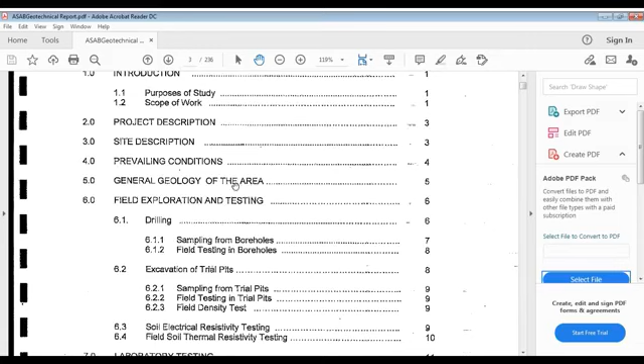It says introduction, purpose of study. What are the purposes of study? Then scope of work. After that is project description and site description, prevailing conditions, general geology of the area, and then field exploration and testing, which includes drilling, sampling from boreholes, field testing in boreholes, then excavation of trial pits, sampling from trial pits, field testing in trial pits, field density test, soil electrical resistivity testing, and field soil thermal resistivity testing.

Laboratory testing, laboratory tests on cores, surface and subsurface conditions, ground materials, materials' physical, mechanical and thermal properties, materials' chemical properties, sulfate content, chloride content, other chemical contents, oil and grease and hydrocarbons, pH value. Then groundwater and cavities, then general discussion for choice of suitable foundation, which is a very important one, footing on sand, general consideration of settlement, consideration of bearing capacity, choice of type of foundations.

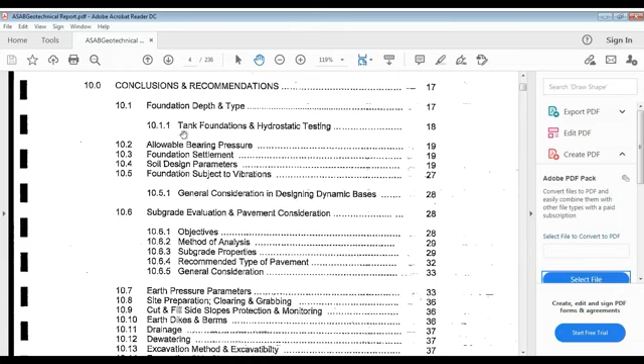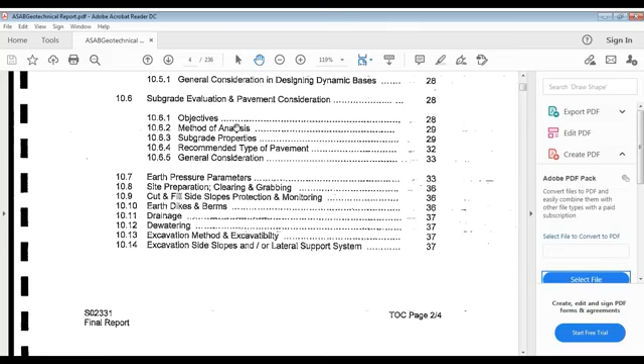Conclusions and recommendations. In these conclusions and recommendations: foundation depth and type, tank foundations and hydrostatic testing, allowable bearing pressure, foundation settlement, soil design parameters, foundations subject to vibrations, general considerations in designing a dynamic base, subgrade evaluation and pavement consideration, objectives, method of analysis, subgrade properties, recommended type of pavement and general consideration.

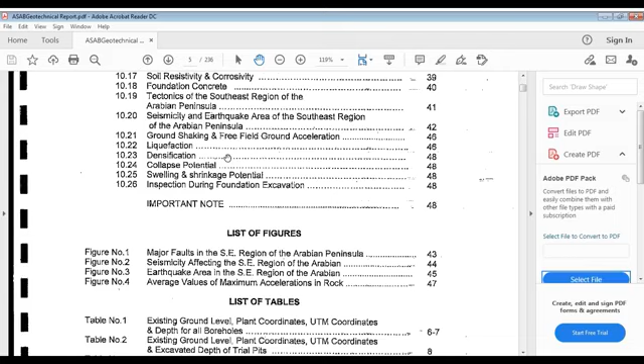Earth pressure parameters, site preparation, clearing and grubbing, cut and fill, side slopes, protection and monitoring, earth dikes and berms, drainage, dewatering, excavation method and excavatability, side slopes and lateral support system, backfill material and compaction criteria, structural fill, general fill, borrow sources, soil resistivity and corrosivity, foundation concrete, tectonics of the southeast region of the Arabian Peninsula, seismicity and earthquake areas, ground shaking and free field ground acceleration, liquefaction, densification, collapse potential, swelling and shrinkage potential, inspection during foundation excavation, and then some notes.

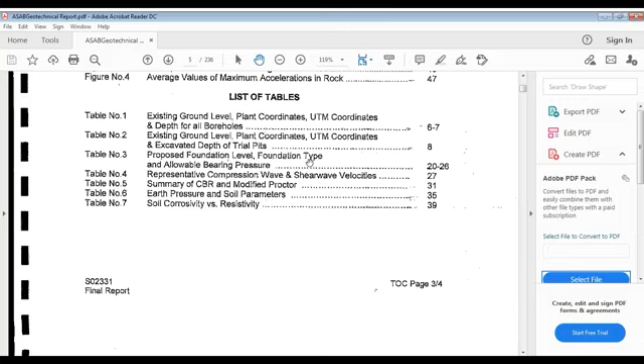The list of figures: major faults in the southeast region of the Arabian Peninsula, seismicity affecting the southeastern region of Arabia, earthquake areas, and average values of maximum acceleration in rock. List of tables: existing ground level, plant coordinates, UTM coordinates, and depth of all boreholes; the same with excavated depth of trial pits; proposed foundation level, foundation type, and allowable bearing pressure; representative compression wave and shear wave velocities; summary of CBR and modified Proctor; earth pressure and soil parameters; soil corrosivity versus resistivity. And later we have appendix A, B, C and D.

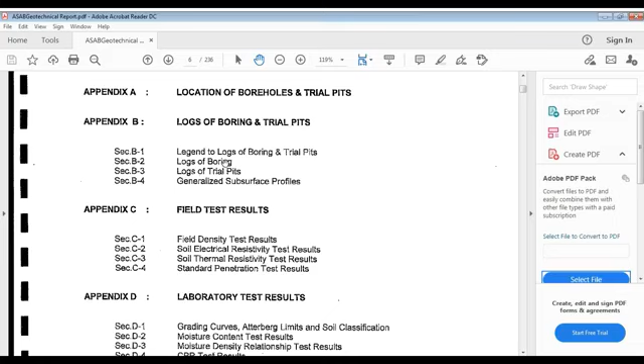Appendix A is location of boreholes and trial pits. Appendix B is logs of boring and trial pits, with legend, logs of boring, logs of trial pits, and generalized subsurface profile. Appendix C is field testing results: field density, soil electrical resistivity, soil thermal resistivity, standard penetration test results, and laboratory test results: grading curves, Atterberg limits and soil classification, moisture content, moisture density relationship, CBR, laboratory permeability, laboratory thermal resistivity, oil and grease, and chemical test results for soil and groundwater.

This is an index in 4 pages, just a revision of the index again. You can see it's a long index because the report is long. This report is more than 200 pages, and this is the table of contents. You can see yourself what is in the introduction, project description, site description, prevailing conditions, general geology of the area. These are very general.

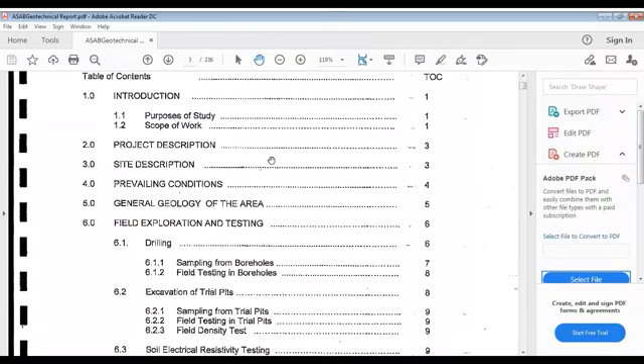After introduction, project description, site description, prevailing conditions, general geology of area, field exploration testing, drilling, excavation of trial pits, and then soil electrical resistivity testing, field soil thermal testing, and laboratory testing codes, and then surface and subsurface conditions, which is a very technical one. There are ground materials, material physical, mechanical, and thermal properties, materials chemical properties, sulfate contents, chloride contents, other chemical contents, oil and grease hydrocarbons, pH value, etc.

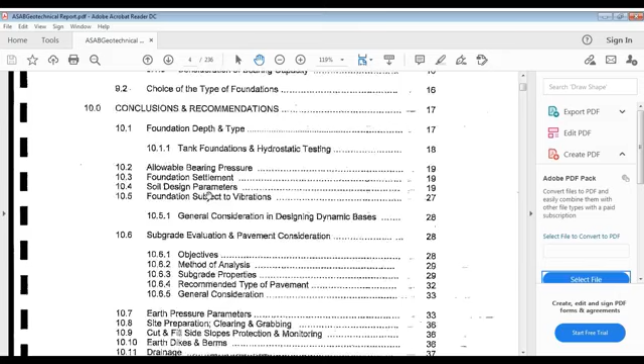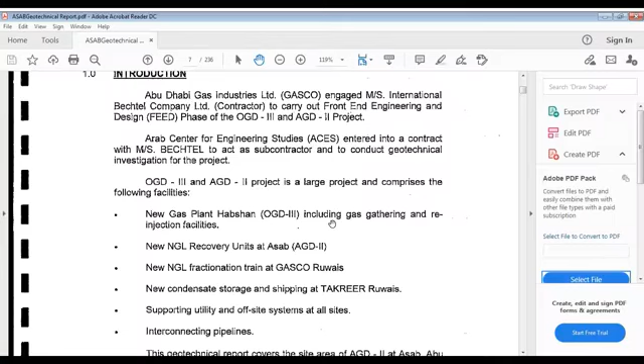So this is a general discussion, and all these conclusions and recommendations. Then all this is about its contents, and we have to do a lot of work and have patience for this if you want to get something here. This kind of study, you can say it's a case study. I can say this is not report submission. You are just, as an engineer, studying what this soil investigation is all about, irrespective of what that project is.

Every project has some purpose, some objective, some scope. In this case, what's the purpose of the study? The purpose of the study is to determine surface and subsurface conditions at the proposed project, and physical, mechanical, and chemical properties of the investigated ground in order to provide the structural engineer with sufficient information for design of the most suitable and safe foundations.

The scope of work consists of the following, which is a very important point, because every engineer has to give this scope of work. It's the engineer who is responsible for a project. His duty is to provide what investigation is required if you are hiring some laboratory for this purpose. The laboratory is an approved laboratory, approved by you as well as by the state. The professional laboratory which you select must explain to you in writing what scope of work it will perform.

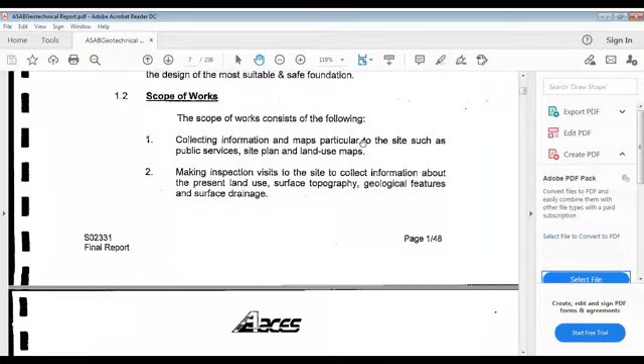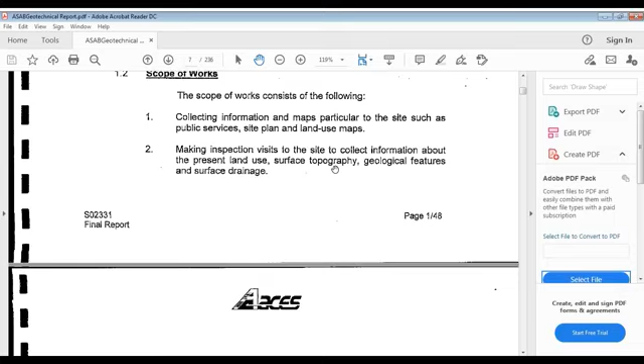The scope of work consists of the following: collecting information and maps particular to the site such as public services, site plan and land use maps. This comes under geographical information and mapping. Making inspection visits to the site to collect information about present land use, surface topography, geological features and surface drainage. These are very important points. As I said before, number one is collecting information and maps, and number two is making inspection visits to the site.

Then 3, drilling a total of 28 boreholes. You can decide your way. It may be 28, 30, 50, it's up to you, depending on how much accuracy you want. Drilling a total of 28 boreholes, in situ testing and sampling of disturbed and undisturbed samples. 4 is excavation of 3 trial pits. 5 is carrying out 14 field density tests, and 6 is carrying out 18 electrical resistivity tests with 0.75 meters, 1.5 meters, 2.25 meters, 3 meters and 4.5 meters spacing. So the spacing from one point to the next is 75 centimeters, 0.75 meter.

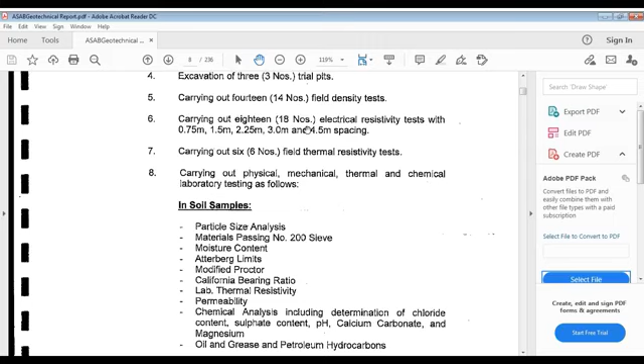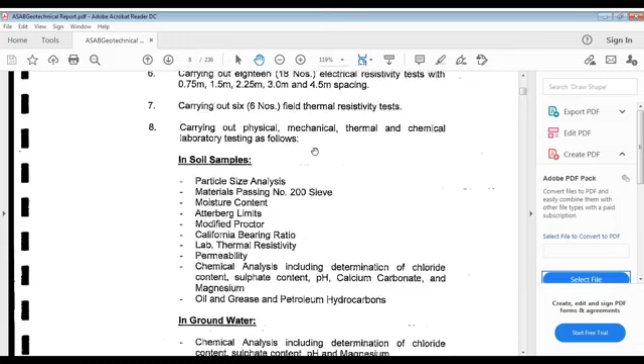Now carrying out 6 field thermal resistivity tests, and carrying out physical, mechanical, thermal and chemical laboratory testing as follows. In soil samples: particle size analysis, which is very important, particularly in granular soils, material passing number 200 sieve, moisture content, Atterberg limits, modified Proctor, California bearing ratio CBR, laboratory thermal resistivity, permeability, and chemical analysis including determination of chloride content, sulfate content, pH, calcium carbonate and magnesium, oil and grease, and petroleum hydrocarbons.

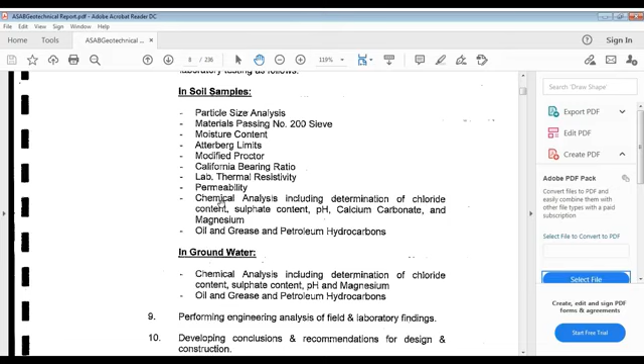This is a kind of full range test, not a particular parameter, but complete, including chemical tests. So once again, particle size analysis, material passing 200 sieve, moisture content, Atterberg limits, modified Proctor, California bearing ratio, lab thermal resistivity, permeability, chemical analysis including chloride content, sulfate content, pH, calcium carbonate and magnesium, oil and grease, and petroleum hydrocarbons. This was on soil.

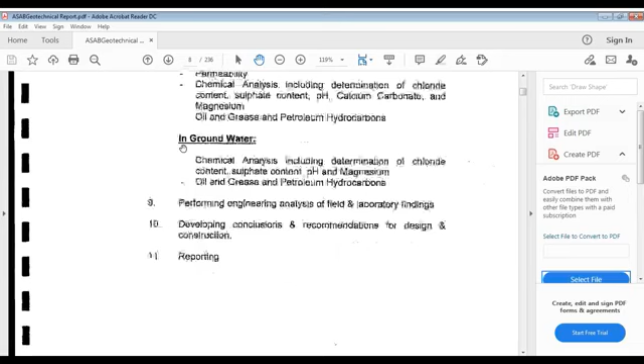Now in groundwater, chemical analysis including determination of chloride content, sulfate content, pH and magnesium, oil and grease, and petroleum hydrocarbons. And performing engineering analysis of field and laboratory findings, and developing conclusions and recommendations for design and construction, and reporting.

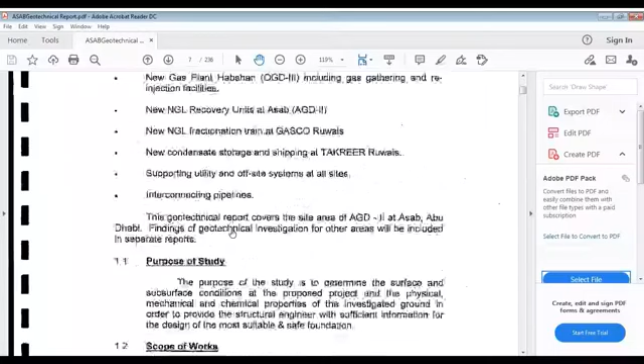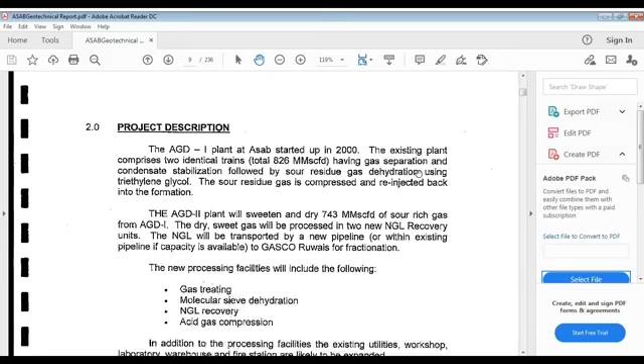So this is the documentation required for this case: you have to provide this report and do all this. Not just going outside on the job, scolding someone and coming back. We have to be involved with the complete technical part. Now, project description, leave it, because this is not very important for us. We only need to know this is a plant project with 2 identical trains. So come on now, site description.

Why I am showing you this report is that we have to understand what is professional work done in soil engineering and soil explorations. It's not that we go and just give a 4 or 5 page report, 10 page report, and it's done. We have to understand various patterns according to international bodies, international. You have also

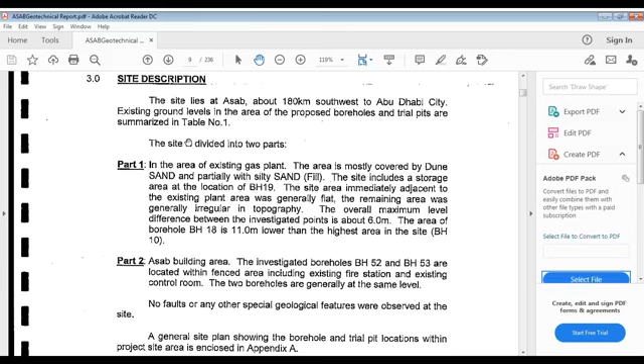Okay, now we do one thing, site description. I was just thinking of how to best explain this. When our site is in Asab, leave it how far it is. Now it says the site is divided into 2 parts. In area of existing plant, area is mostly covered by dune sand and partially with silty sand. That's called fill. Site includes a storage area at location of borehole 19.

Site area immediately adjacent to existing plant area was generally flat. Remaining area was generally irregular in topography. Overall maximum level difference between investigated points is about 6 meters. Area of the borehole BH18 is 11 meters lower than highest area in site, borehole 10.

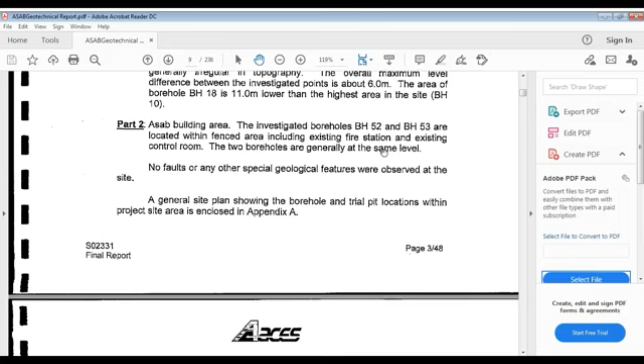Now in part 2, this is building area. Investigated boreholes 52 and 53, numbers are here, not necessary for us, are located within fenced area, including existing fire station and existing. Then you can say in this case, these 2 building areas and 2 boreholes are generally at same level, no faults or other special geological features were observed at these sites.

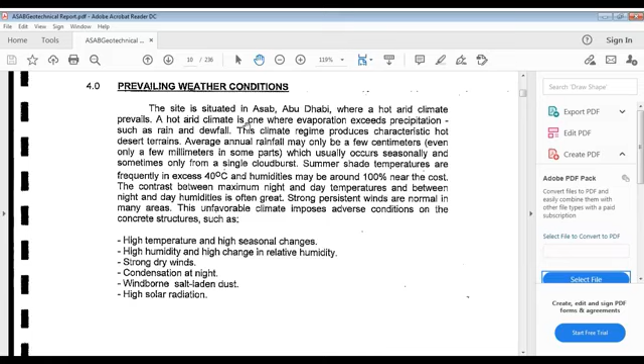A general site plan showing boreholes and trial pit locations at project area is enclosed. We will see appendix A later. Now, let us know what are prevailing weather conditions. We should make it a part of the report, because this is international issue. It's not national alone. So, the site is situated in a hot arid climate, where evaporation exceeds precipitation.

A hot arid climate is one where evaporation exceeds precipitation, such as rain and dewfall. This climate produces characteristic hot desert terrains. Average annual rainfall may only be a few centimeters, even only few millimeters in some parts, which usually occurs seasonally and sometimes only from a single cloud burst. Summer shade temperatures are frequently in excess of 40 degrees Celsius, and humidities may be around 100%.

Okay, humidity is 100% near coast, the spelling is wrong, don't worry. Contrast between maximum night and day temperature, and between night and day humidities is often great. Strong persistent winds are normal in many areas. This unfavorable climate imposes adverse conditions on concrete structures such as high temperature and high seasonal changes.

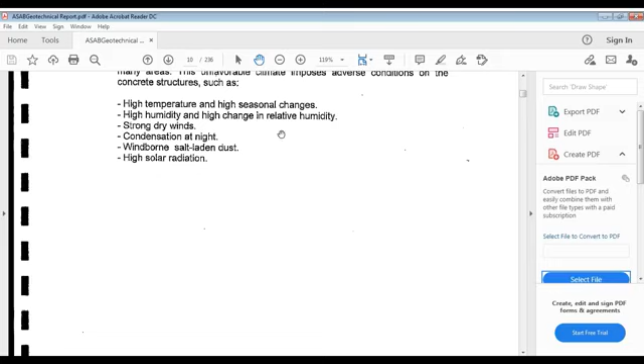We have to say high temperature and seasonal changes. It's very important from many points of view. Then because humidity is high and relative humidity is high, and winds and condensation at night and wind-borne salt laden dust, and high solar radiation. All this is in the report. All this must be. Now, general geology of area.

Everywhere, you must have geology. You must understand geology of the area before conducting soil investigation on that. It's very important from every point of view. That's what is required by an engineer to understand very well what should be done, what should not be done. We cannot simply say you go and start. If it's a big project, you have to chart out a plan like that. Maybe cost of soil investigation is not that much, but its implications on project are high.

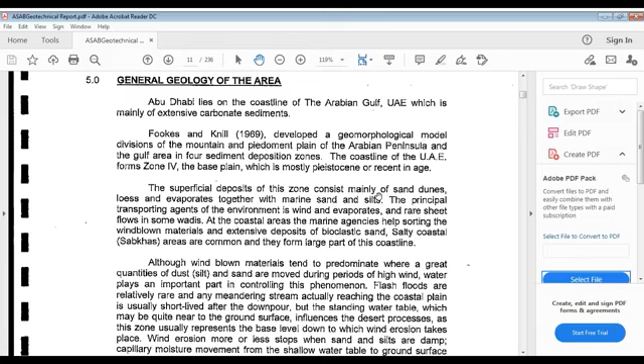Now general geology, for example, geology of area. There was someone who developed a geomorphological model, division of piedmont plain of Arabian Peninsula, Fookes and Knill, 1969. And they did it in Gulf area with 4 sediment deposition zones. Coastline of UAE forms zone 4, base plain, which is mostly Pleistocene or recent in age. This Pleistocene is geological, I must say, geology is a science that

The coastline of UAE, the superficial deposits of this zone consist mainly of sand dunes, loess and evaporites together with marine sand and shells. Principal transporting agents of the environment are wind and evaporation, with rare sheet flows in some wadis. At coastal areas, marine agencies help sort wind-blown materials, with extensive deposits of bioclastic sand.

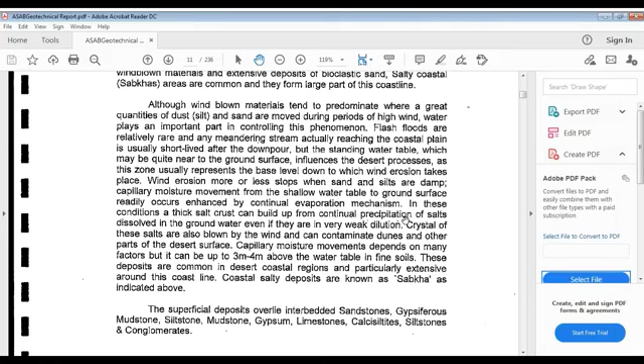But the standing water table, which may be quite near the ground surface, influences desert processes, as this zone usually represents the base level down to which wind erosion takes place. Wind erosion more or less stops when sand and silts are damp. Capillary moisture movement from the shallow water table to the ground surface readily occurs, enhanced by continual evaporation. In these conditions, a thick salt crust can build up from continual precipitation of salts dissolved in groundwater, even if they are in very weak dilution. Crystals of these salts are also blown by wind and can contaminate dunes and other parts of the desert surface.

Capillary moisture movement depends on many factors, but it can be up to 3 to 4 meters above the water table in fine soils.

These deposits are common in the desert coastal region and particularly extensive around this coastline. Coastal salty deposits are known as sabkha, as indicated above. Superficial deposits overlie interbedded sandstones, gypsiferous mudstone, siltstone, and gypsum.

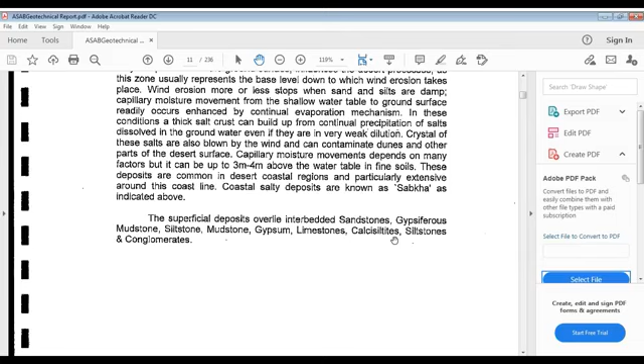Let us say superficial deposits overlie interbedded sandstones, gypsiferous mudstones, siltstones, mudstones, gypsum, limestones, calcisiltites, siltstones, and conglomerates.

Now, field exploration, what you have to do, that's the point here. We have to think and then decide. Professionalism means what should be done to meet the scope of work. That's what field exploration is about. It's a question of time, you have to consider the quantum of work, and of course irrelevant investigation is not required. Only relevant investigation which can help us is required. That's the main point here.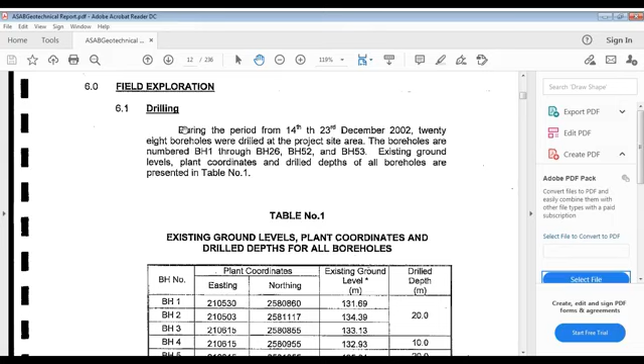Now it says field exploration, number one is drilling. Drilling is a very important point because we have boreholes. During the project period, 28 boreholes were drilled at the project site area. Boreholes are numbered BH1 through BH26, BH52 and BH53. Existing ground levels, plant coordinates and drill depths of all boreholes are presented in table number 1.

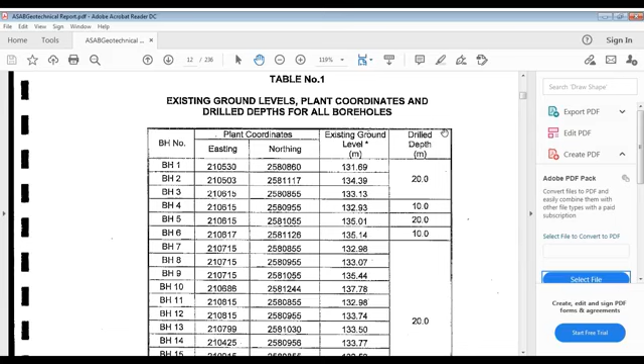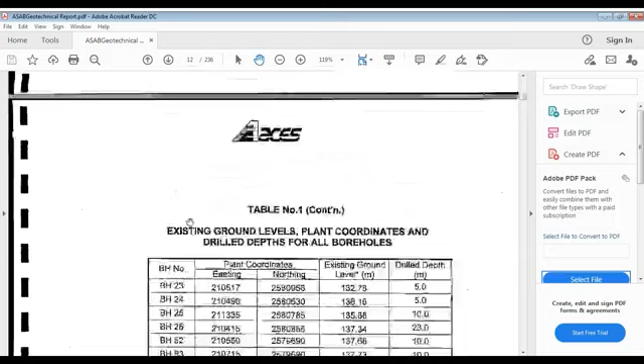Now BH1 to BH22, and then number 23 to 53 are there, which you can see the plant coordinate easting and northing are given. This is clear, there's no use speaking of those. These are actual site locations of this borehole, where it's located on this easting and on this northing, which we can take by GPS system.

Then the existing ground level is in meters, at 131.69, and the drill depth for this is 20, for this 3, 1, 2 and 3. This is the drill depth information, then you see BH4, 5 and 6, and these are coordinates for them, at 132. These levels, 3 levels are there - this is reduced levels, you can say. Existing ground levels, which are also called reduced levels, and actual levels are from a fixed point, whatever.

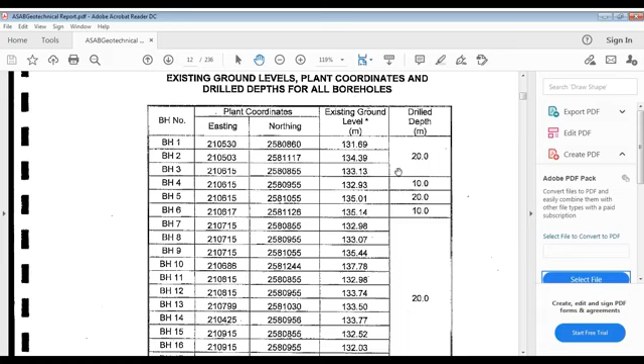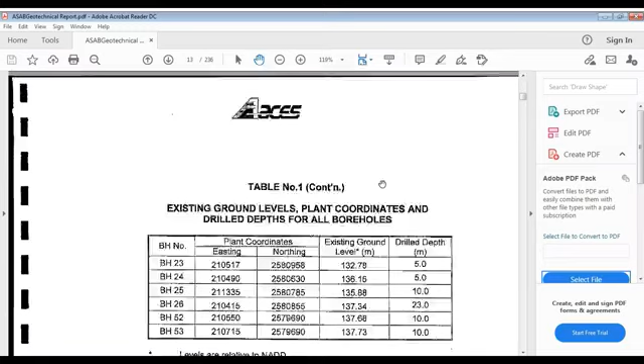So this is one major piece of information, that is over.

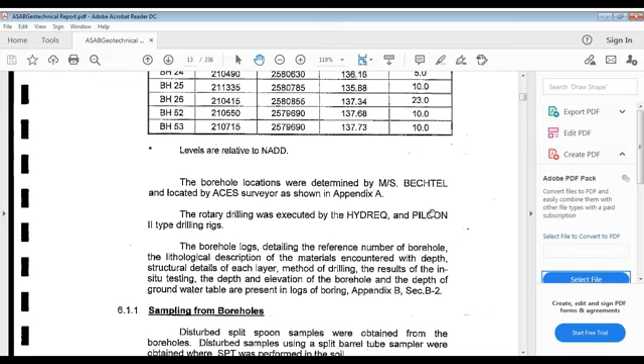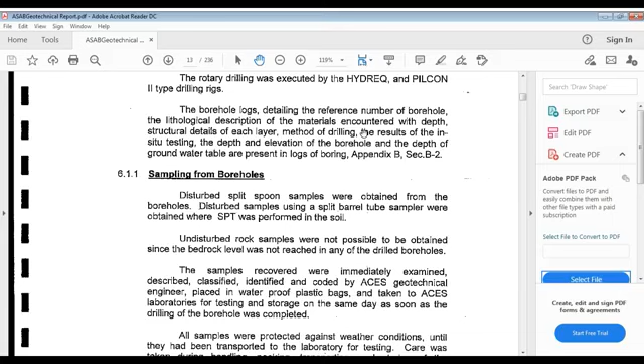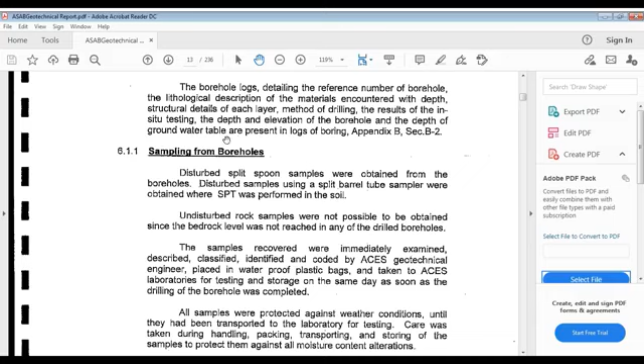So the lithological description of materials encountered with depth, structural details of each layer, method of drilling, results of in-situ testing, depth and elevation of borehole, and depth of groundwater table are presented in the log of boring in the appendixes.

Sampling from boreholes. Now, disturbed split spoon samples were obtained from boreholes. Disturbed samples using a split barrel tube sampler were obtained where SPT was performed in soil. Undisturbed rock samples were not possible to obtain since bedrock level was not reached in the drilled boreholes.

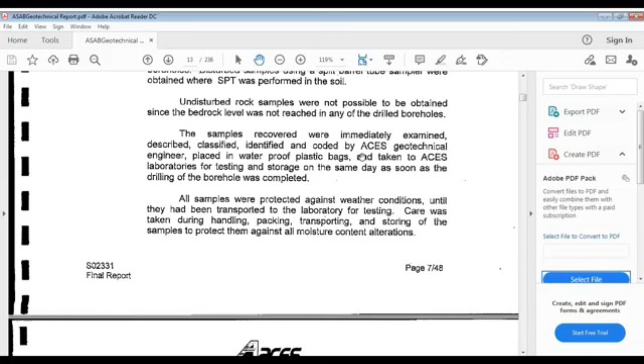Samples recovered were immediately examined, described, classified, identified, and coded by the ACES geotechnical engineer, placed in waterproof plastic bags, and taken to ACES laboratories for testing.

Now we can say again, samples recovered were immediately examined, described, classified, identified, coded by ACES geotechnical engineer, placed in waterproof plastic bags and taken to laboratory for testing and storage on the same day as soon as drilling of boreholes was completed. All samples were also protected against weather conditions until they had been transported to the laboratory.

For testing, care was taken during handling, packing, transporting, and storing of samples to protect them against all moisture content.

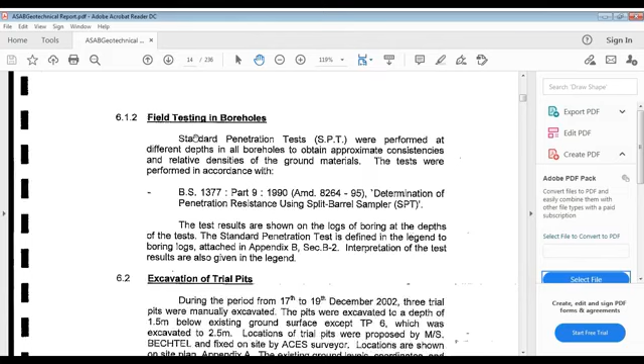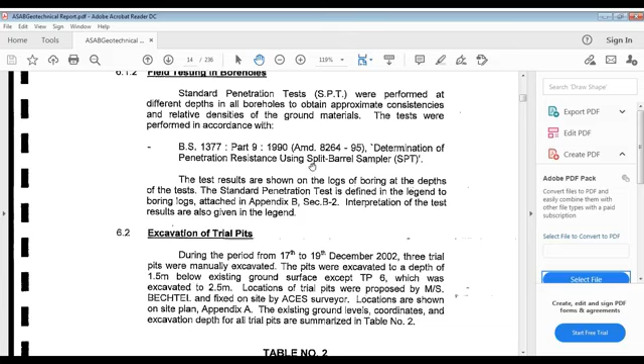Now, field testing in boreholes. Standard penetration test SPT were performed. SPTs were performed at different depths in all boreholes to obtain approximate consistencies and relative densities of ground materials. Tests were performed in accordance with BS 1377, Part 9, 1990, Amendment 8264-95, determination of penetration resistance using a split barrel sampler SPT.

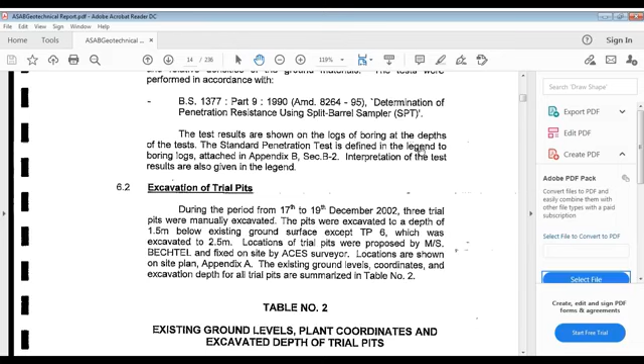Test results are shown on logs of boring at depths of test. Standard penetration test is defined in the legend to boring logs attached in Appendix B, Section B2. Interpretation of test results are also given in the legend.

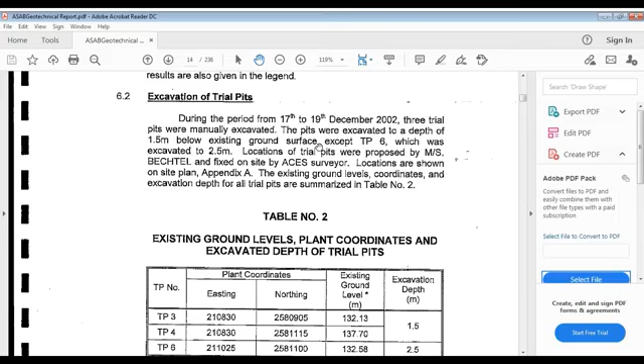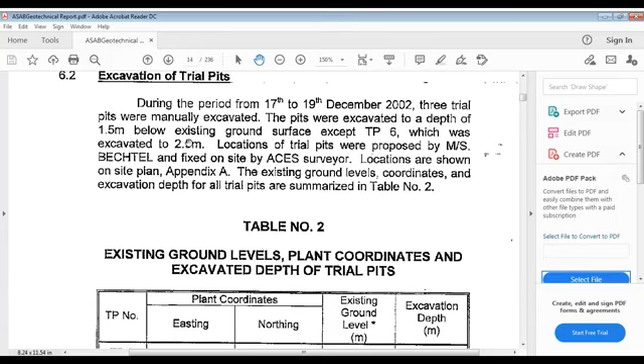Pits were excavated to a depth of 1.5 meters below existing ground surface, except TP6, which was excavated to 2.5 meters. Locations of trial pits were proposed accordingly.

Locations are shown. Existing ground level, coordinates and excavation depths for all trial pits are summarized in Table 2, showing plant coordinates easting and northing, existing ground levels, and excavation depth. For TP3, 4 and 6, the easting and northing are shown, and the difference in existing ground level determines excavation depth, for example 132.13, with excavation depth 1.5 for two of these, and different for another since it is higher.

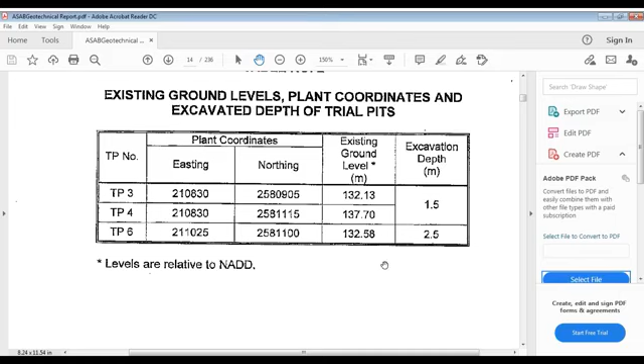Now, further, they will start the sampling from trial pits, sampling from trial pits.

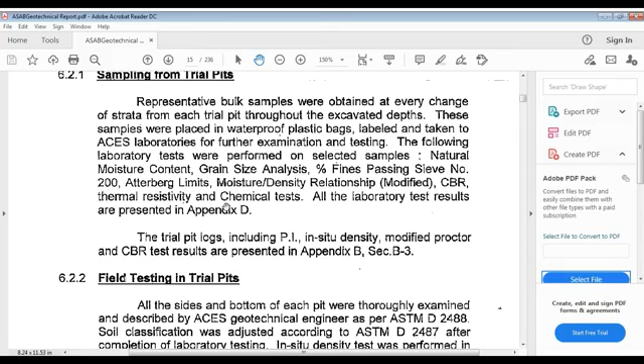So the sampling involves natural moisture content, grain size analysis, percentage fines passing sieve number 200, Atterberg limits, moisture density relationship, modified CBR, thermal resistivity, and chemical tests. All our test results are presented in the following section.

Trial pit logs including PI, in situ density, modified Proctor, and CBR tests are presented in Appendix B. We'll see that later on, not now.

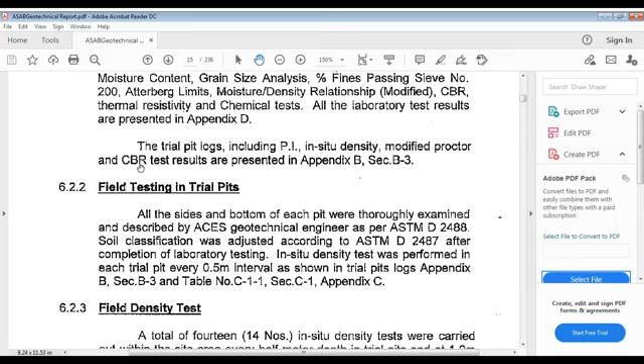Field testing in trial pits, that's important. All sides and bottom of each pit were thoroughly examined and described by a geotechnical engineer. Soil classification was adjusted according to ASTM D2487 after completion of laboratory testing. In situ density tests were performed in each trial pit at every 0.5 meter interval, as shown in trial pit logs, Appendix B, section B3.

Sides and bottom of each pit were thoroughly examined and described by a geotechnical engineer according to ASTM D2488. Soil classification was adjusted according to ASTM D2487 after completion of laboratory testing. In situ density tests were performed in each trial pit at every 0.5 meter interval, as shown in trial pit logs, Appendix B, section 3.

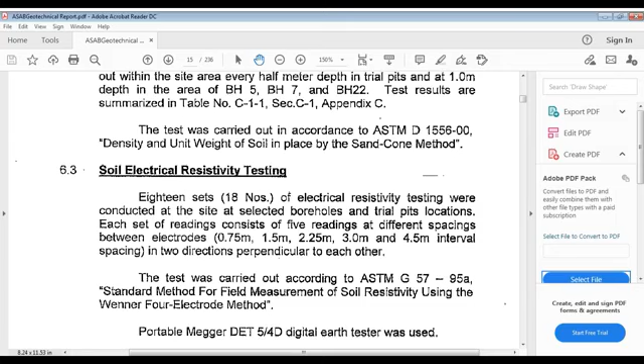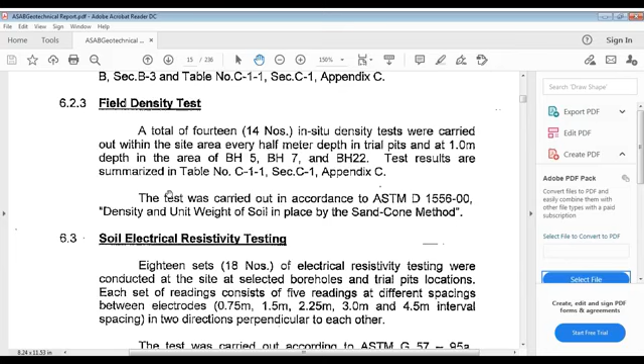These are the tests performed - a total of 14 in situ density tests carried out in the site area, with results summarized here. Tests were carried out in accordance with ASTM D1556, density and unit weight of soil in place by sand cone method, for trial pits.

Soil electrical resistivity testing is very important. Soil engineers may not always care for this, but it is necessary and required. 18 sets of electrical resistivity testing were conducted at site at selected boreholes and trial pit locations. Each set of readings consists of 5 readings at different spacings between electrodes: 0.75, 1.5, 2.25, 3, and 4.5 meters.

Now soil resistivity testing: 18 electrical resistivity tests were conducted at site at selected boreholes and trial pit locations, each with a range of 5 readings at different spacings. The electrode spacing is 0.75 meter, 1.5 meter, 2.25 meter, 3 meters, and 4.5 meter intervals. Spacing in 2 directions.

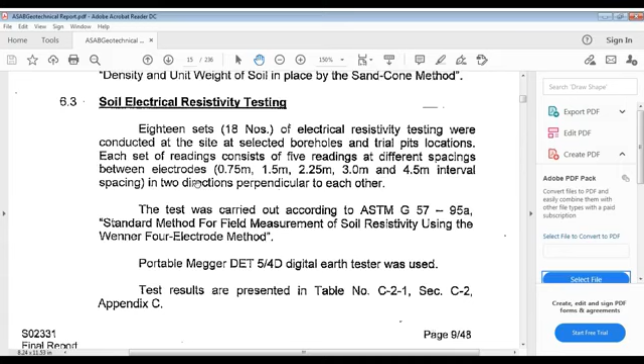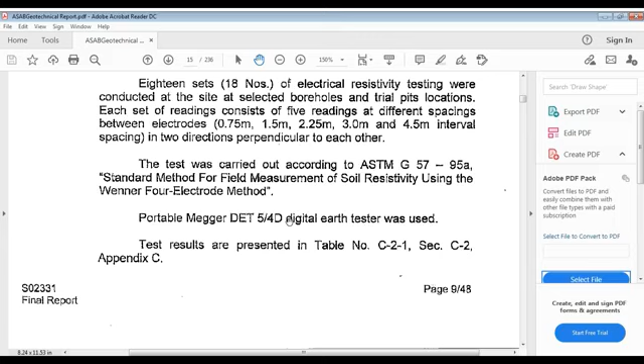So these are conducted at usual spacing in 2 directions perpendicular to each other, and you can say here that the test was carried out according to ASTM G57-95, standard method for field measurement of soil resistivity using the Wenner 4-electrode method. A portable Megger DET 5/4D digital tester was used. Test results are presented in tables like this. Field soil resistivity test.

Then you can say six field needle tests. Needles were penetrated into soil and the resistance of the thermistor in the probe was recorded using a DMM, digital multimeter, attached to the thermistor point on the front panel of the power supply unit. Soil thermal resistivity was determined depending on temperature difference in time intervals. Temperature of the probe during the test was calculated using the temperature resistance relation, taking into consideration all field needle characteristics.

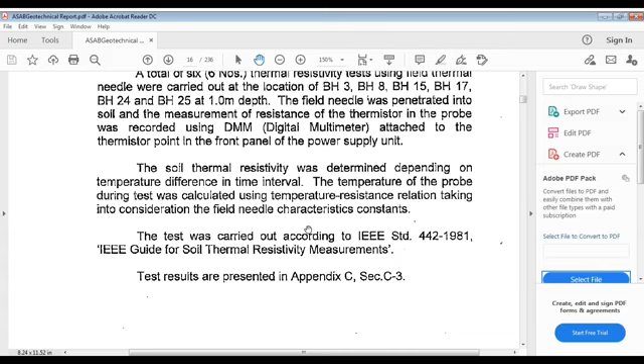Now we go a little more. Let me repeat this. It says soil thermal resistivity was determined depending on temperature difference and time intervals. That's the most important point. Temperature difference and time intervals. We have to relate the difference of time and difference in temperature. Temperature of the probe during the test was calculated using the temperature resistance relation, taking into consideration field needle characteristic constants. The test was carried out according to IEEE Standard 442-1981.

Alright, laboratory testing. I have some minutes only. Actually, how many hours are gone? Let me see. It's taken 1 hour. Okay. So I will not take much in this because it's already 1 hour.

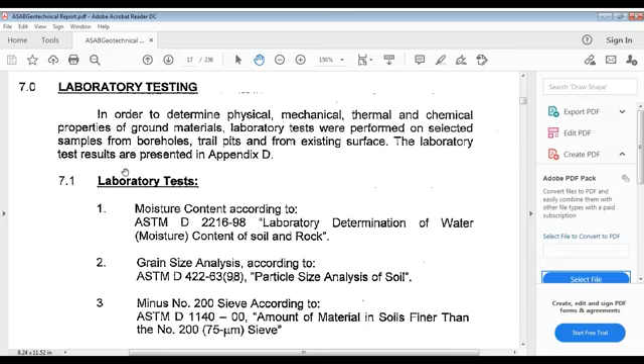Laboratory testing here. Laboratory testing was done in order to determine physical, mechanical, thermal and chemical properties of ground materials. Laboratory tests were performed on selected samples from boreholes, trial pits and the existing surface. Laboratory test results are presented in Appendix D. Now what laboratory tests are we doing? Moisture content according to ASTM D2216-98, laboratory determination of water moisture content of soil and rock.

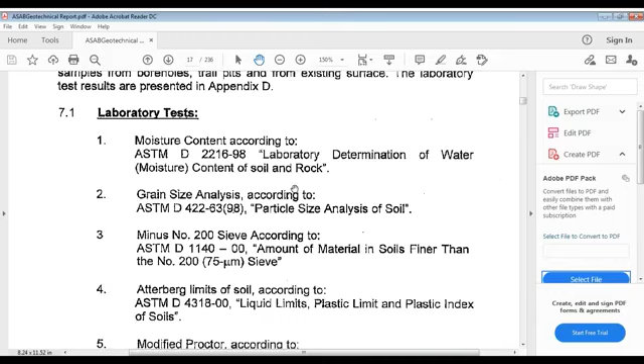Grain size analysis according to ASTM D422-63(98), particle size analysis of soils. Minus number 200 sieve according to ASTM D1140-00, amount of material in soils finer than the number 200 (75 micrometer) sieve. Atterberg limits of soil according to ASTM D4318, the liquid limit, plastic limit, and plasticity index of soils.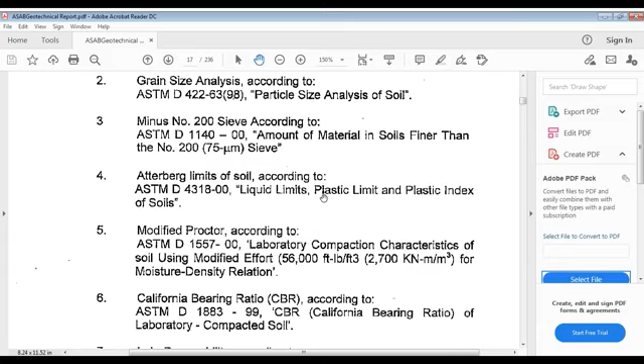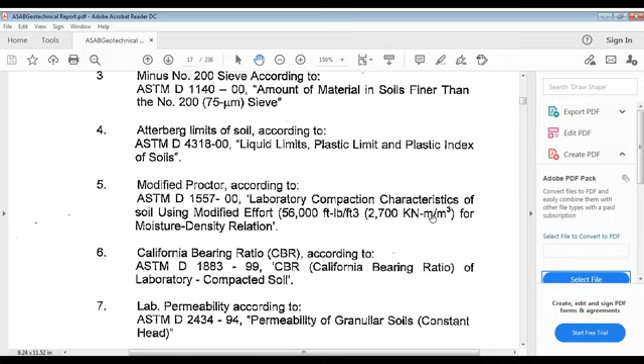And modified Proctor according to ASTM D1557-00, laboratory compaction characteristics of soil using modified effort, 56,000 foot-pound-force per cubic foot, or 2,700 kilonewton-meters per cubic meter. That's the unit for the moisture density relation. And then California Bearing Ratio, CBR, according to ASTM D1883.

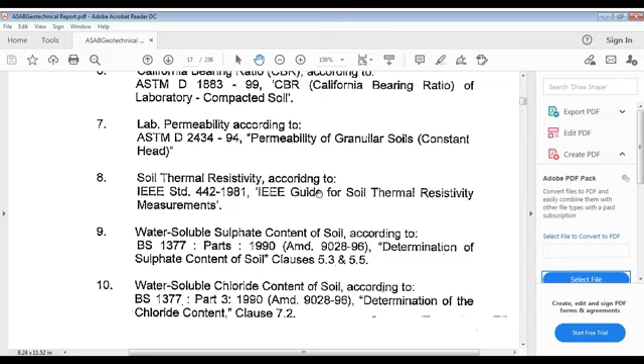So you can say California Bearing Ratio, CBR, according to ASTM D1883-99, CBR of laboratory compacted soils. Lab permeability according to ASTM D2434-94, permeability of granular soils, constant head, and soil thermal resistivity according to IEEE Standard 442-1981, IEEE guide for soil thermal resistivity measurements.

And water soluble sulfate content of soil according to BS 1377 Part 3 1990, amendment 9028-96, determination of sulfate content of soil, clause 5.3-5.5, and water soluble chloride content of soil. You can say soil thermal resistivity according to this, as we have said, IEEE Standard 442-1981, and water soluble sulfate content of soil according to BS 1377.

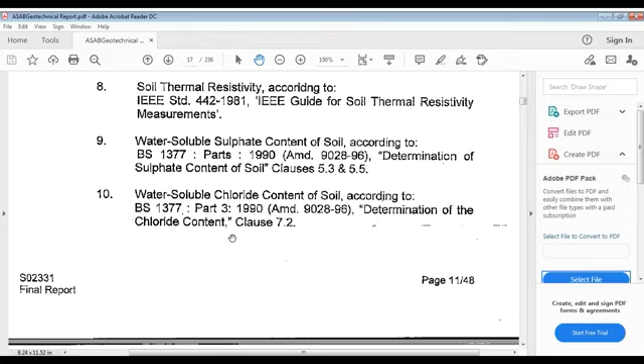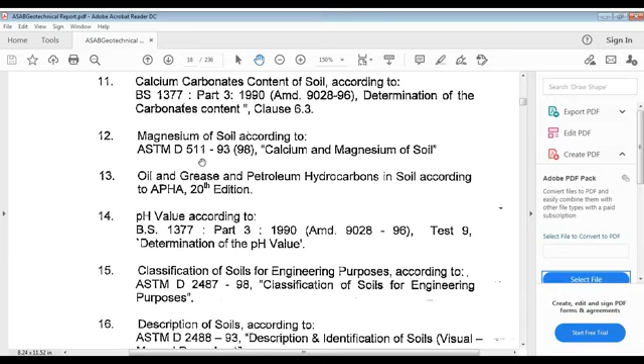Now this is just 11 pages covered. I would just like to show you a few more because there are so many. Just like calcium carbonate content of soil according to BS 1377 Part 3 1990, amendment 9028 96, determination of carbonate content, clause 6.3, and calcium and magnesium of soil according to ASTM D511-93, calcium and magnesium in soil, and oil and grease and petroleum hydrocarbons in soil according to APHA 20th edition.

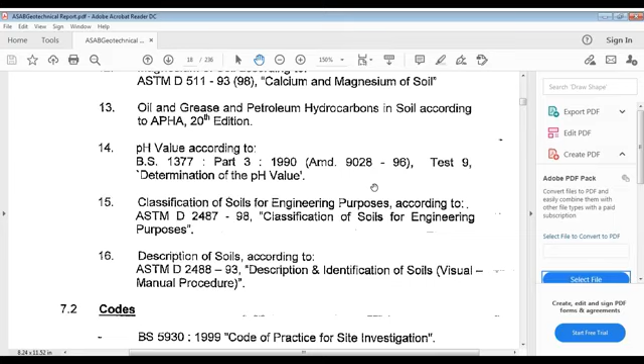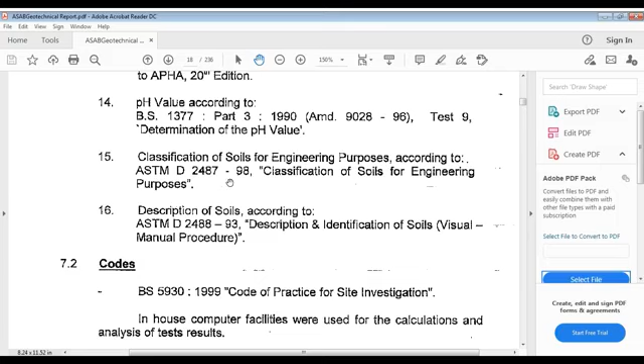You can say pH value according to BS 1377 Part 3 1990, amendment 9028 96, test 9, determination of pH value, classification of soils for engineering purposes according to ASTM D2487, and description of soils according to ASTM D2488, description and identification of soils, visual manual procedures. I'll stop here now.

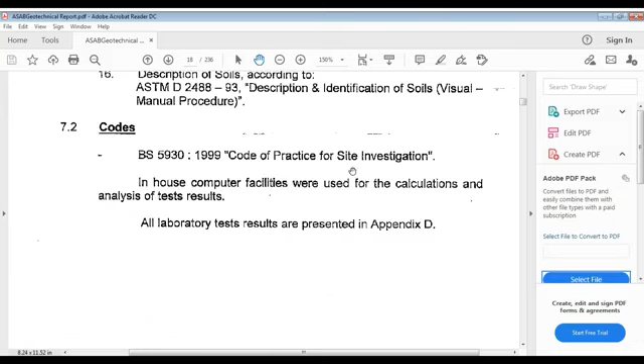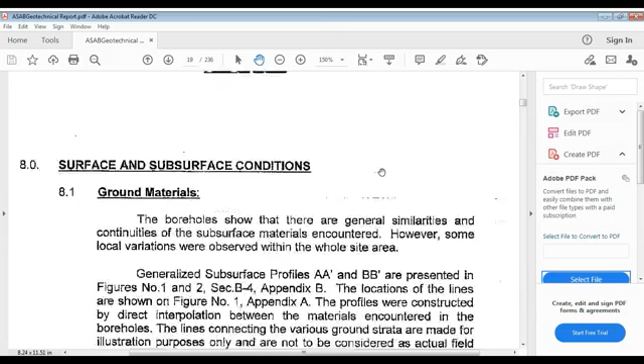I think I'll take tomorrow only page 18. There's a list of codes. Let's see which codes these are. BS 5930 1999, Code of Practice for Site Investigation. In-house computer facilities were used for calculation and analysis of test results. All laboratory test results are presented in Appendix D, and then we have to see surface and subsurface conditions. That's page 19. I will hold on here because it's just the start of this. I think we can take it up later.

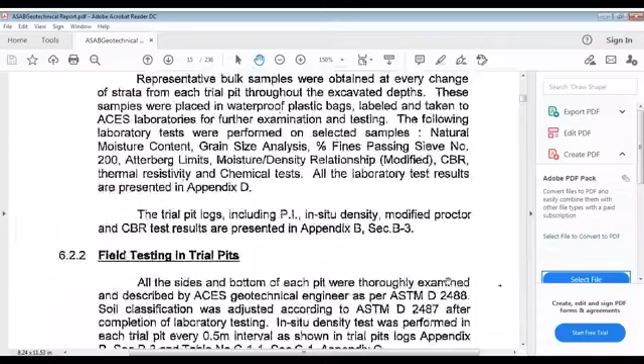I understand that this is a different kind of presentation, a reference presentation, where we can move in a different direction, to have a kind of case study that we never did before practically, and that's very important. I'll just rewind this so you can see what we have gone through. So we have gone through all this. All pages I'm retrieving back for your reference so that you may have an understanding.

I'm not saying this is a perfect file, but to understand something we must refer to something, because this is a kind of referral resource done by people who are well experienced and have attained a level of expertise in the field of soil investigation and research, because they do research work on this, and that's where we have to depend on them.

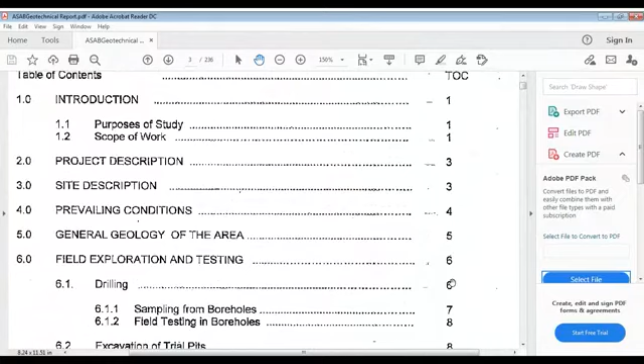With this I should close this. It's better if I close this, let's go to this one, close this one here. This is the live video, and now stop sharing. There's nothing there.

What I mean to say is that we understand what's happening and what's not happening. I try to bring this information back again and again, and I hope it helps you. I'm not sure this part will be recorded because this is document sharing. This file is more than a few pages. I'd like to discuss this in detail. Identification is a must, and it's there for everything, and I would like to close this here and take it up again.

I think on average about 1 hour or 1.5 hours daily, whenever it's practical, we will take videos 1, 2, 3 or 4 as practical. Particularly engineers who are interested in this can benefit. In addition to the academic study of soil engineering and foundations, we have gone through bearing capacities and N values, how to rate N values, how to modify bearing capacities, and safe bearing capacity. We continue on this, and on contracts also.